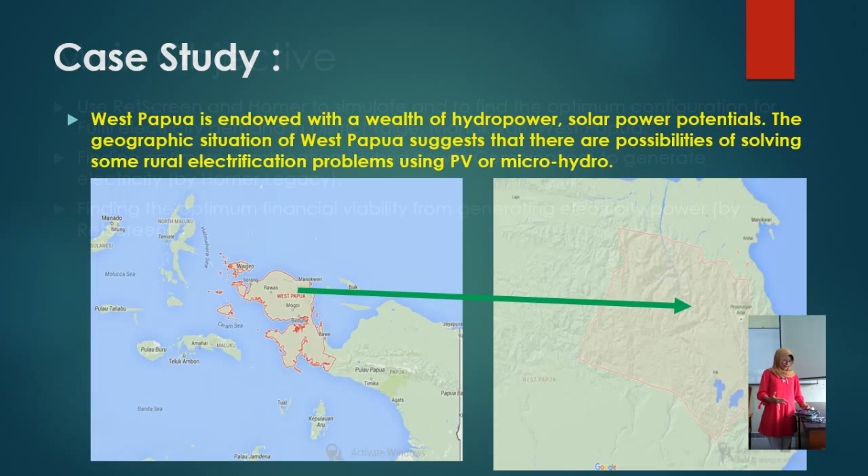However, the sites are not always accessible and the maintenance of such system is very poor. Because fuel and spare parts have to be obtained from the city combined with the continuous fuel price fluctuations, this solution is not recommended for poor rural dwellers. A hybrid energy system where electricity is generated using multiple renewable sources significantly improves efficiency and the sustainability of such a system. This is therefore recommended for rural areas.

Main objective. First, we use RetScreen and Homer to simulate and find the optimum configuration to fulfill electricity demand in District Taige, Manokwari, West Papua. Finding the optimum hybrid power combination to generate electricity by Homer Legacy. Finding the optimum financial viability from generating electricity power by RetScreen.

Basic configuration. The electric current and voltage of PV power varies with different solar intensity and environmental temperature, and thus the output of PV power is unstable. If the PV array is incapable to real-timely track the change of external environment, the overall efficiency of PV power system will decrease inevitably. The technology of maximum power point tracking or MPPT is developed to continuously obtain the maximum power output at any sunshine and temperature.

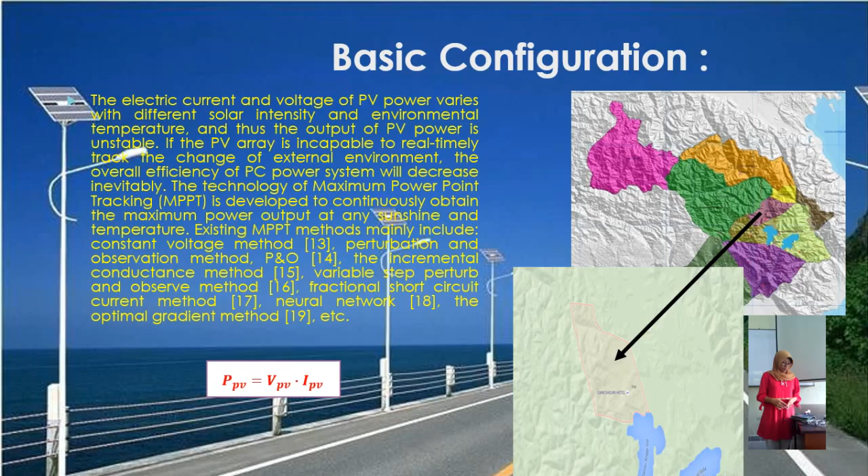Existing MPPT methods mainly include constant voltage method, perturbation and observation method, the incremental conductance method, variable step perturb and observe method, fractional short circuit current method, neural network, the optimal gradient method, etc. With a twin shaft tracking device and MPPT, the power output of PV array is only determined by solar radiation and temperature comparing standard test conditions and general cases. The PV power output can be derived on the basis of the model as shown in equation 1.

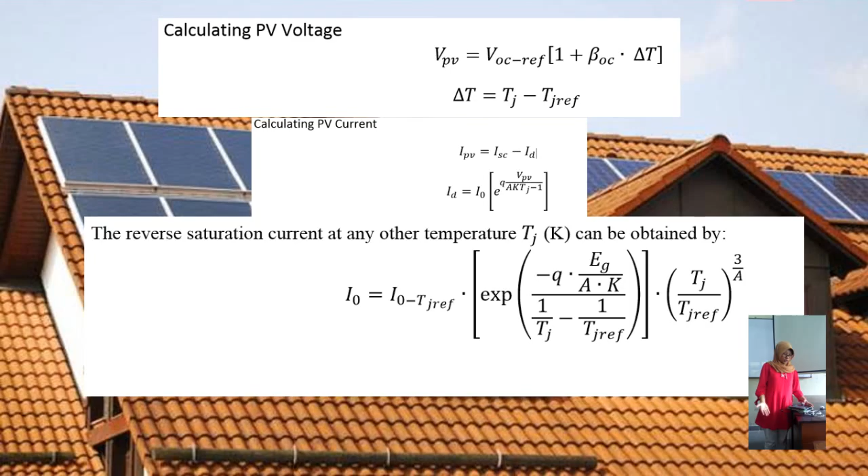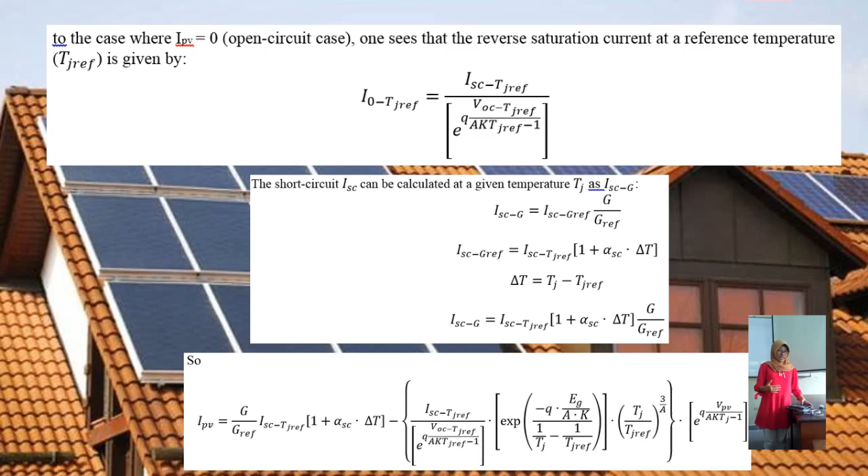And then calculating PV voltage. The formula is like in the slide. Here we would like to find the reverse saturation current at any other temperature, and then to the case where IPV is 0 or open circuit case, one sees that the reverse saturation current at a reference temperature or TREF is given by those equations. So we got the current of PV is like in a formula.

And then the annual PV power for PV module with 315 watt peak. The data we got from NOAA, and we know that the lowest PV power is in June to August, and the highest is in October to November.

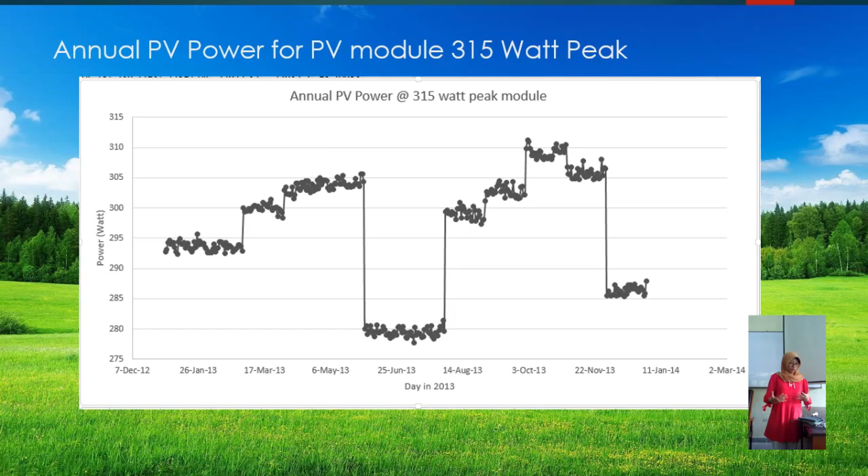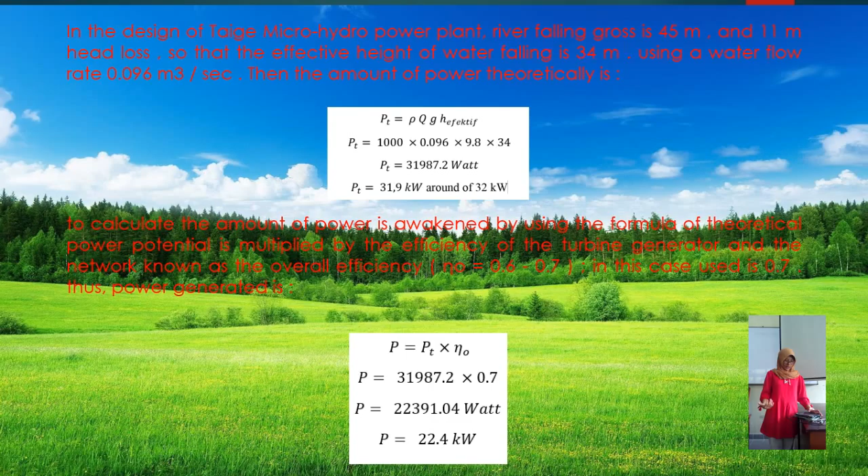In the design of Taige Micro Hydropower Plant, river gross fall is 45 meters and 11 meter head loss, so that the effective height of fall is 34 meters, using a water flow rate of 0.096 cubic meters per second. Then the amount of power theoretically is calculated by using the formula of theoretical power potential multiplied by efficiency of the turbine generator and the network, known as the overall efficiency. That is 0.6 until 0.7, and in this case we use 0.7.

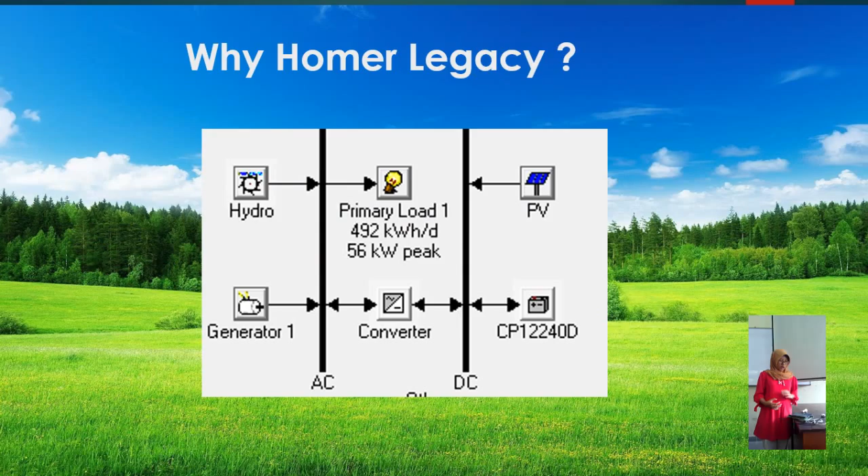So the site has annual average horizontal irradiation of 5.93 kilowatt-hour per meter square per day. The load profile corresponds to needs of the village. At night time, the electricity is needed mainly for lighting. During daytime, it's used for small industries. Therefore, using Homer, the constraints that best fit the running conditions can be freely chosen, depending on the available facilities; the minimum renewable energy fraction, the minimum PV energy fraction, and so on can be chosen as well.

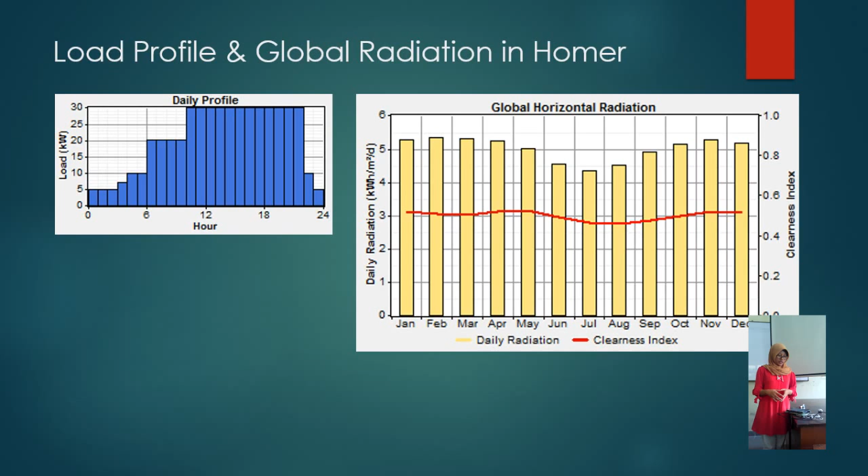Finally, there is a set of sensitivity variables that can help in choosing the best technical, economical, or environmental solution. Homer accepts either monthly or hourly stream flow data. So an hourly data set has been created for the micro hydro plant by assuming that the stream flow remains constant throughout each day. The resource input describes the availability of solar irradiation and hydro flow rate for each hour of the year. For solar and hydro resources, we have imported data from properly formatted files.

So the conclusion: this paper was devoted to simulating and sizing a micro-hydro PV hybrid system for rural electrification. From the results of the system we have designed, it's recommended to implement similar systems in similar sites. We have compared different combinations of component sizes and quantities and explored how variation in source availability and system cost affect the cost of installing and operating different system designs. This could be enough to take a decision concerning electrification of a remote area in a developing country.

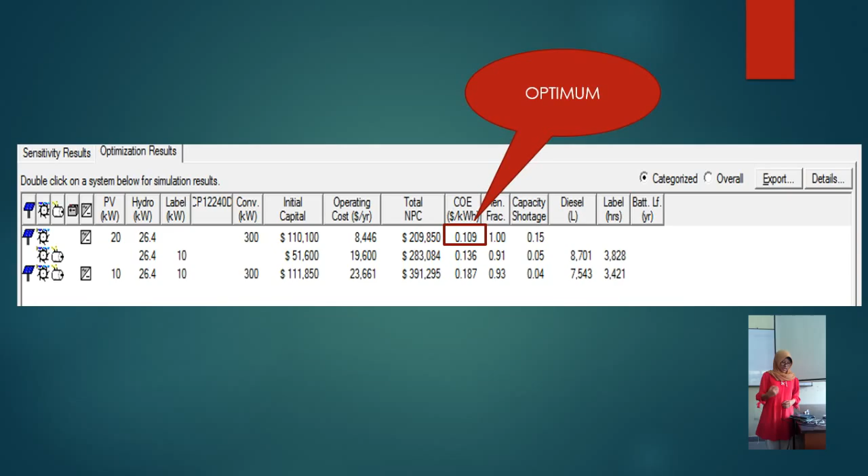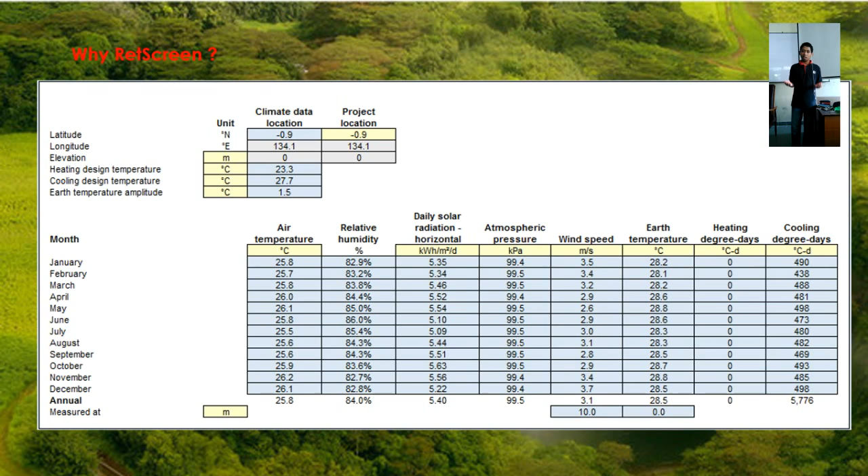Okay, the next is why we use RETScreen. We chose it for financial analysis. This is the data from RETScreen for Manokwari, and from here we know the air temperature, relative humidity, daily solar radiation, atmospheric pressure, wind speed, earth temperature, heating degree days, and cooling degree days based on data from NASA.

And the next is the proposed case power system. For the base load, we choose the hydro turbine, and for the analysis type, we choose method 1. Why method 1? Because it's the simplest method. For the turbine, we want to get power of at least 26 kilowatts, and the price is $30,600. For manufacturer, we choose Hydro Innovation, and the turbine model is Cross-flow with capacity factor 80%. From that, the electricity exported to the grid is 180 megawatt hours.

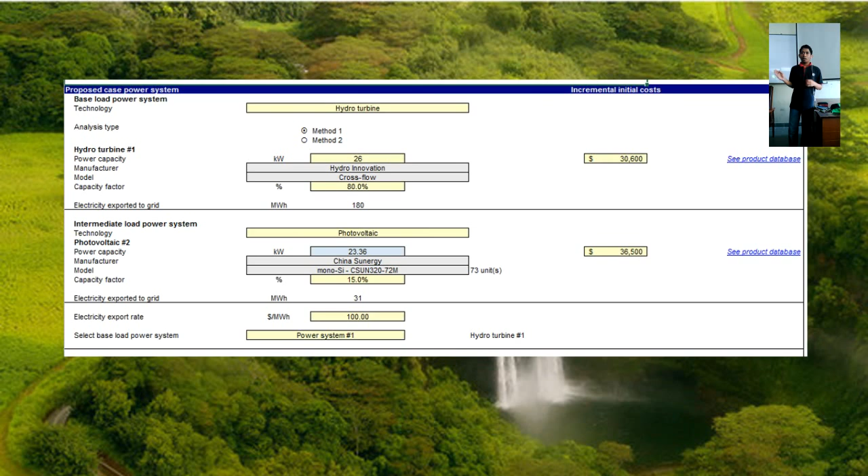For the intermediate load power system, we choose photovoltaic technology, with 73 photovoltaic units, generating at least 23.36 kilowatts, and the price for 73 units is $36,500. With a capacity factor of 15%, the electricity exported to the grid is 31 megawatt hours, and the electricity export rate is $100 per megawatt hour.

And this is the proposed case system summary. The total capacity is 49 kilowatts, and energy delivered is 211 megawatt hours.

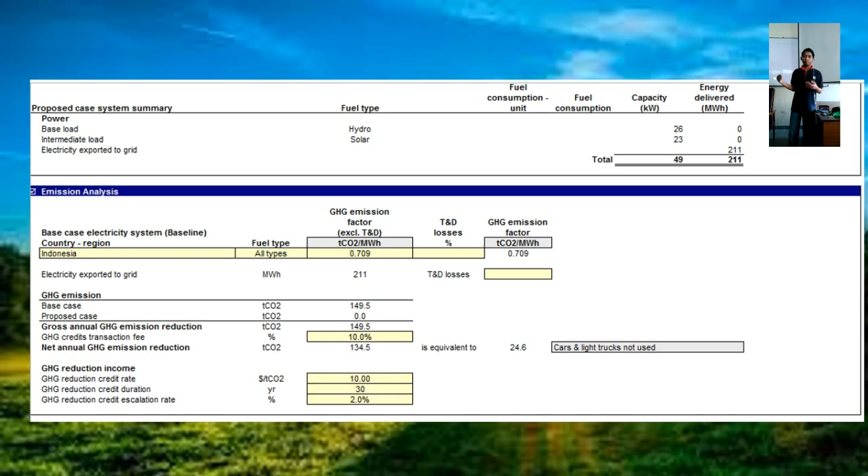And this is the emission analysis. For Indonesia, tons CO2 per megawatt hour is 0.709, and the greenhouse gas emission factor in Indonesia is the same. Electricity exported to the grid is 211 megawatt hours, and the tons of CO2 is equivalent to 24.6 cars and light trucks not used. For greenhouse gas reduction income, we get $10 per ton of carbon dioxide, with a greenhouse gas reduction credit duration of 30 years.

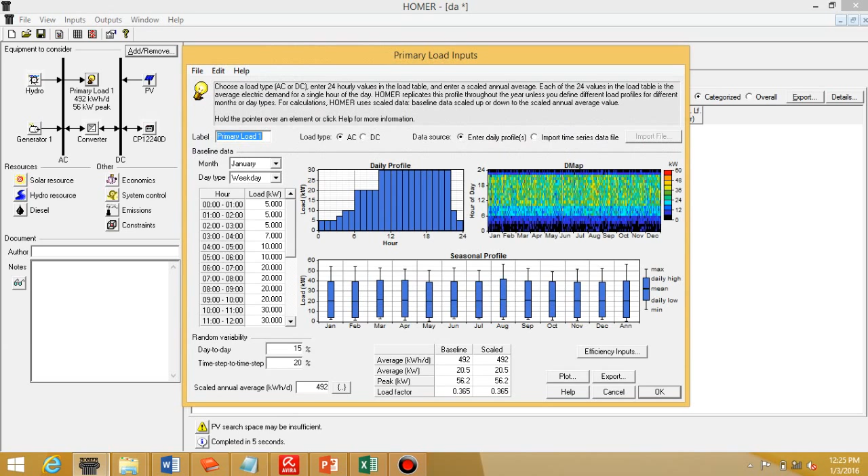Next, we go to the simulation. This is the HOMER simulation. In HOMER, the first thing we choose is the primary load. This is the primary load for the district in Manokwari. We choose day-to-day 15% and time step 20%, and the scaled annual average is 492 kilowatt hours per day.

Okay, next we set the hydro. In hydro, there's the capital cost, as you see here, the replacement cost, O&M cost, and lifetime, where we choose 25 years. The available head is 40 meters, the design flow rate is 96 liters per second, the minimum flow ratio 50%, and the efficiency we choose is 70%, and the generator type we use is an AC generator.

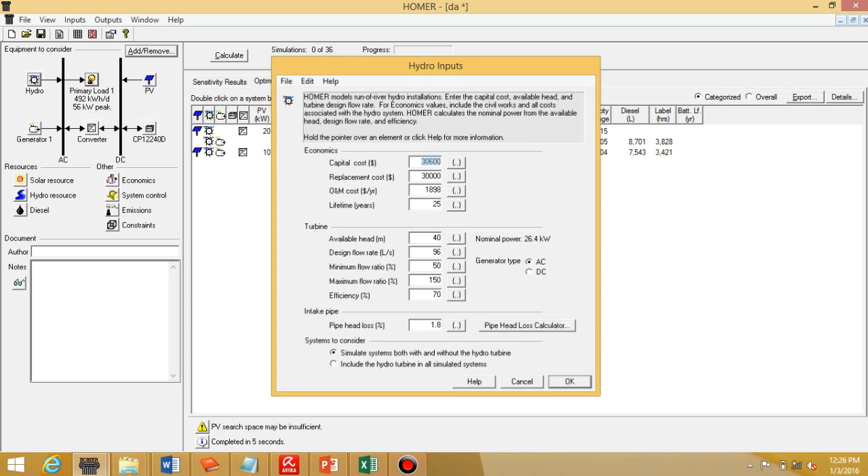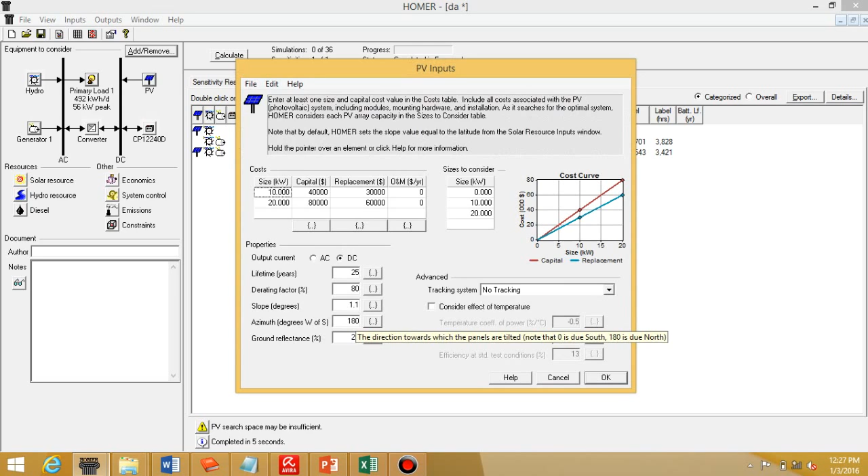Okay, next we set the PV, and the PV sizes we choose are 10 and 20 kilowatts. Lifetime 25 years, derating factor 80%, slope 1.1 degrees, azimuth 180 degrees west of south, and ground reflectance 20%.

Okay, then we choose the converter. This is the setting for the converter. The inverter lifetime is 5 years and efficiency 90%. After that we go to the solar resource. This is the solar resource data from HOMER, and then we choose to calculate it.

Running the simulation, we get that the optimum combination in this calculation is photovoltaic and micro hydropower, with a cost of electricity of 0.132 dollars per kilowatt hour.

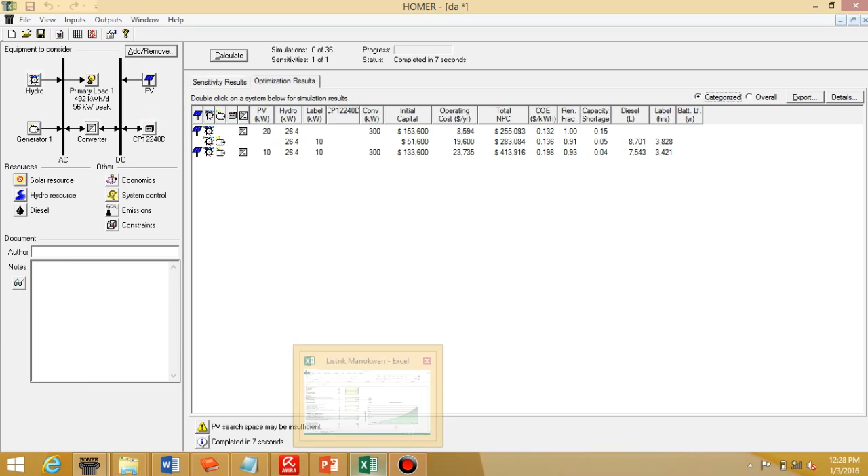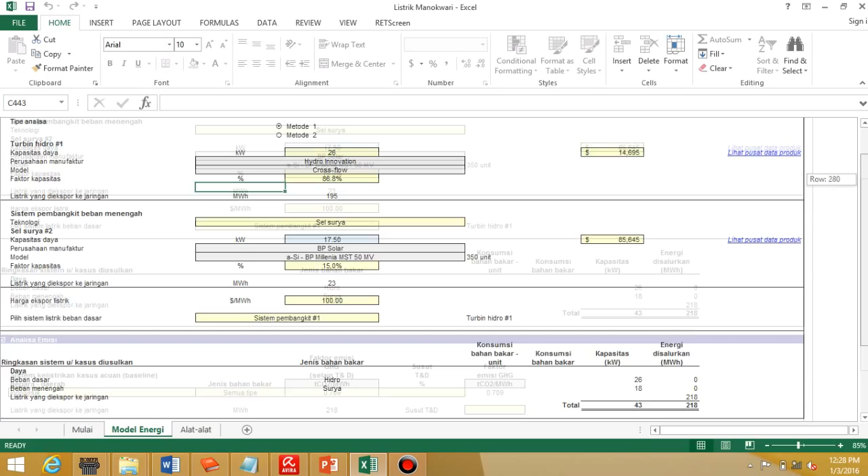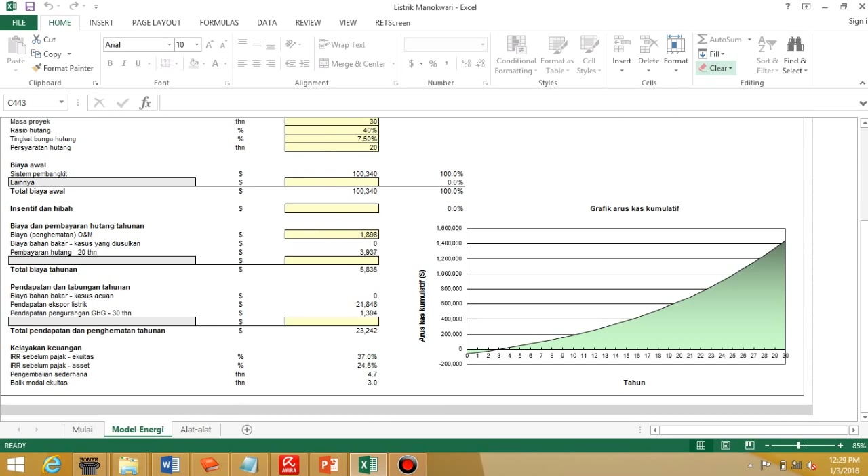This is the simulation in HOMER, and next is RETScreen. This is the simulation in RETScreen. As I said before, this is the data from RETScreen that we get. Okay, back to the slide.